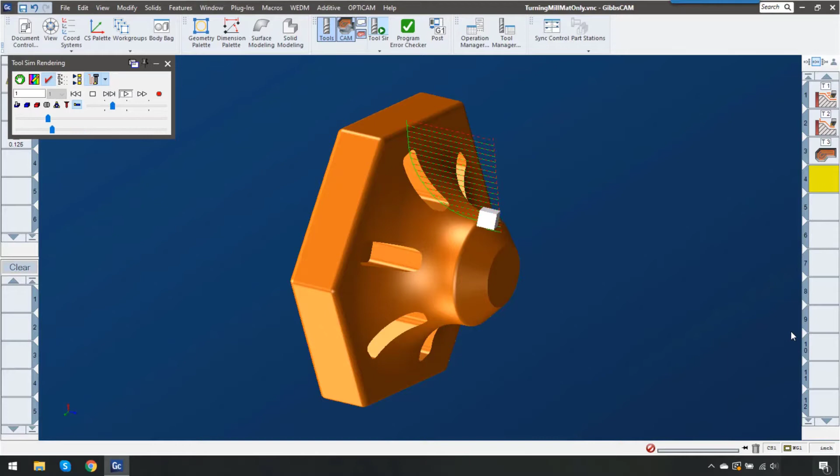This video is going to show the new 3D material only feature in GibbsCAM 14. This feature will calculate the leftover material not just between operations, but between coordinate systems and even between turning and milling operations. We're going to use this example here.

So let me get out of simulation and show you how it works.

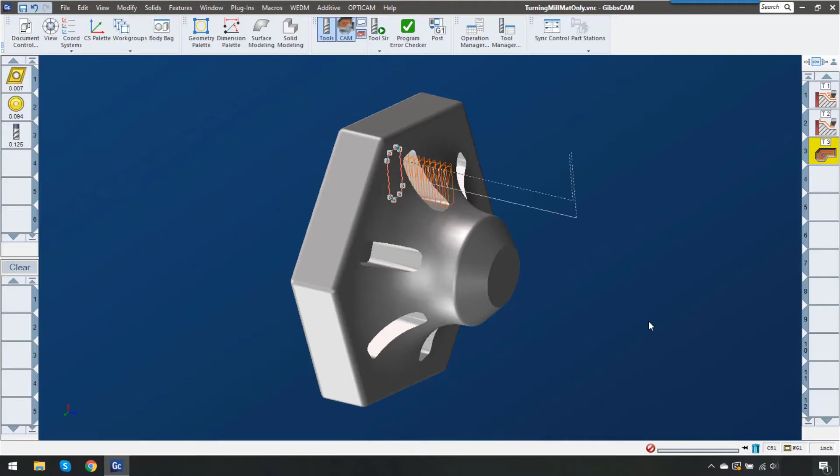So after this part is turned, we're going to end up with a profile something like this. And because of this profile, you can see that there's going to be a lot of air cutting here to do this pocket. What I want to do is tell GibbsCAM, hey, there was something that happened before this. Let's ignore that material that's not there.

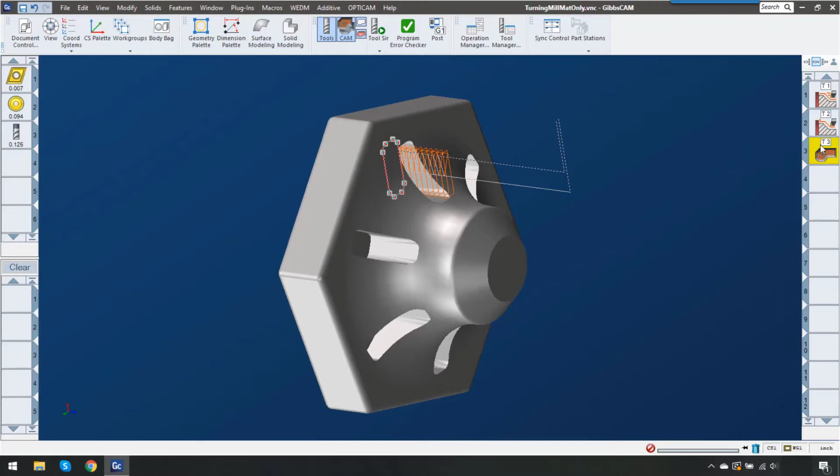And now in GibbsCAM 14, that's really easy to do. Down here at the bottom, we have use stock, and just click on material only. This will calculate the leftover material regardless of operation or coordinate system.

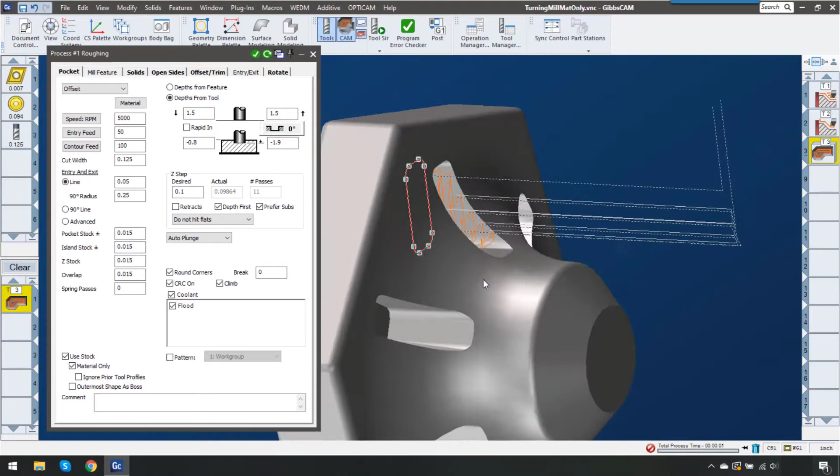Now you can see how much more efficient that toolpath is. This is going to cut down on air cutting, which is going to really speed up your cycle time and get parts off the machine much faster.

Now this example was using the difference between a milling operation and a turning operation. Now let me show an example where it's between two milling operations but using different coordinate systems.

This milling part, I want to machine on my 5th axis. I need to rough it out and finish it, but the reach on my roughing tool is only about 1.5 inches, and you can see here it's 3.5 inches tall. So I'm not going to be able to get all the way down.

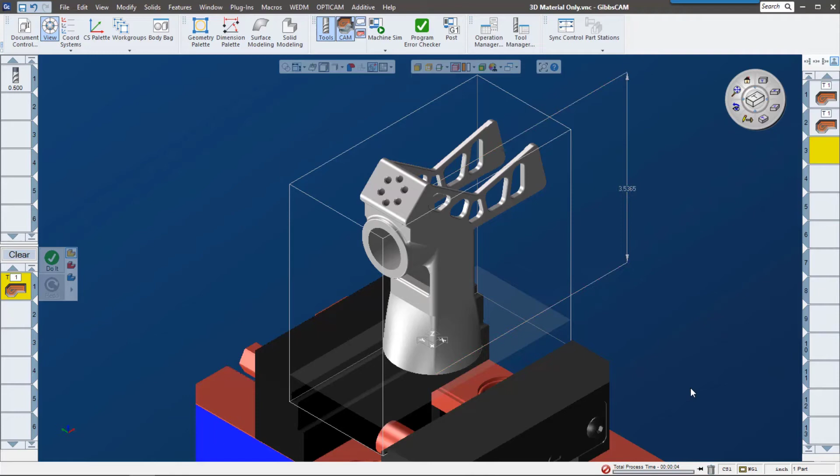Now the problem is, I don't want to have my second tool in this setup have to go through and recut all of the material that it thinks is still there from the previous setup. Now I'll show you an example of that with tool simulation.

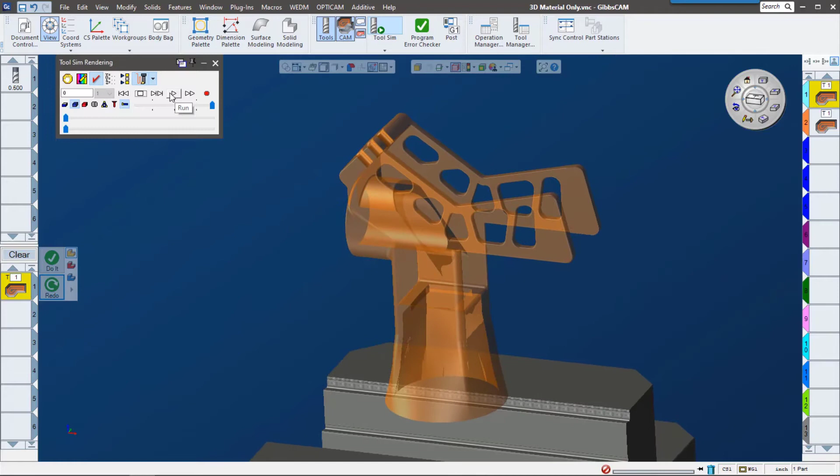Here's the toolpath representation from the first tool. Let me continue on to that second tool. So we can see that there's kind of this cross hatching where the two toolpaths actually overlap. If we look at the top view of this, we can see that the second toolpath is actually coming out and trying to clear away the material that's already gone.

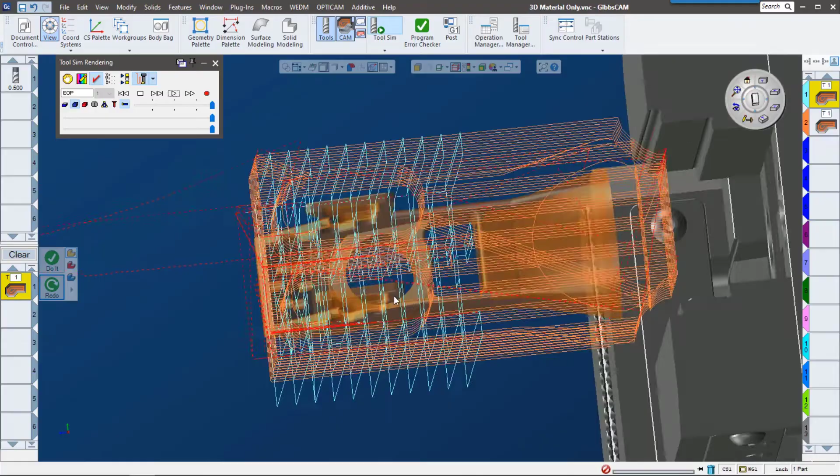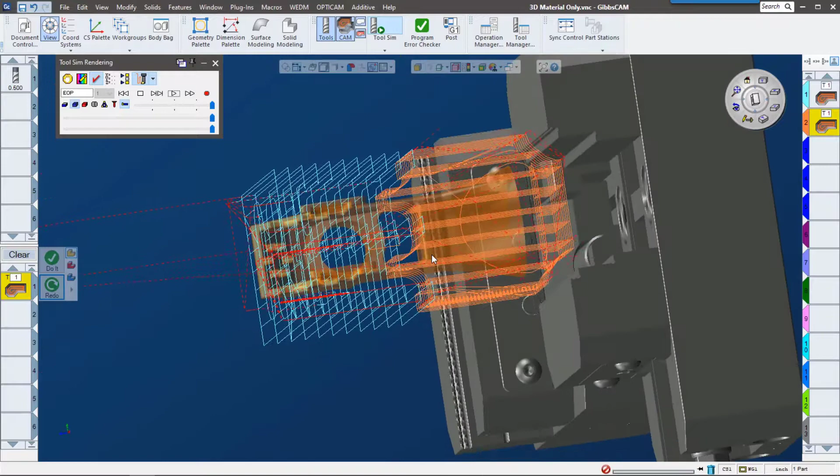In GibbsCAM 14, it's really easy to change that. There's this checkbox that says material only. I'm going to go ahead and redo the toolpath. Let's go ahead and play it now. Now we can see how that second toolpath only addresses the areas that the first toolpath missed.

Let's check this out in Machine Sim. I'm going to go ahead and speed through that first toolpath. So we can see the material that it took away. It took away a good amount of material. Let me back up so we can see the rotation here.

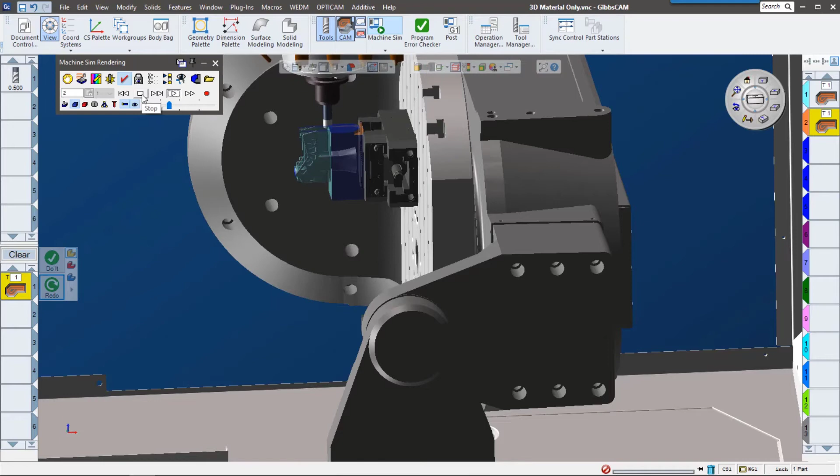So now you can see as I zoom in, that tool is only addressing the material that's left over from that first toolpath. So if you have any questions about 5-axis machining, using different coordinate systems, rest machining, please reach out to your local resellers.